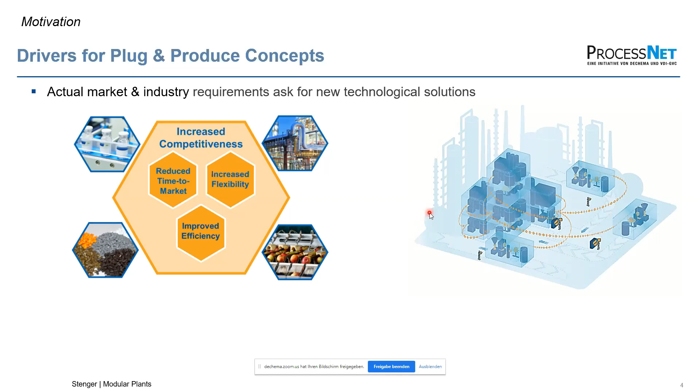The solution that we think can help is modularization on one hand and standardization on the other hand. That could pave the way to a new plant technology, a modular plant technology that uses different process units in a flexible way, connected via standardized interfaces. So really the idea is to make modularization the breakthrough in designing future production plants, applicable not only to new and greenfield plants, but also to optimize existing brownfield plants.

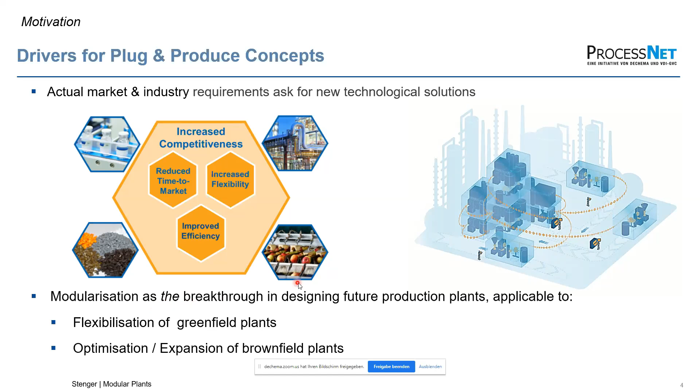When we look at the past, that journey on modularization and standardization started already 10 years ago with a conference in Germany, the Tutzing Symposium, which was called the 50% idea, mainly based on the idea to reduce implementation and development times for new processes by 50%.

Based on that idea, there was the first big project, a European-funded project, the F3 Factory. F3 stands for fast, flexible, and future. Maybe many of you have been part of that project. There were a lot of companies involved, showing that it's possible to modularize process industry from a chemical point of view across a broad range of chemical products.

This was the start, ending in 2013, and this was the point to further gain knowledge, share experience, and continue working on the concepts developed in the F3 Factory. This was when the ProcessNet Working Group Modular Plants was founded, and the first white paper was sent out, which is available on the web page as well.

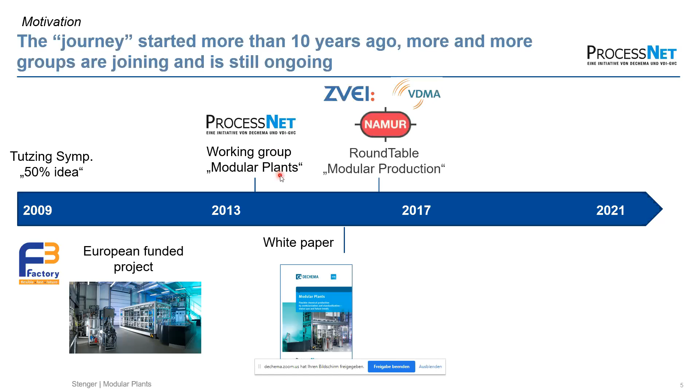It was clear from the beginning that this is not only driven by the owner operators, that there needs to be an alignment with other associations within Germany. So we formed the round table on modular production together with the automation suppliers of Namur, the electronic industry, and also the possible module suppliers. All the associations joined in a so-called round table on that topic, and the first outcome were joint dissemination activities at the Hannover Fair and ACHEMA on that topic.

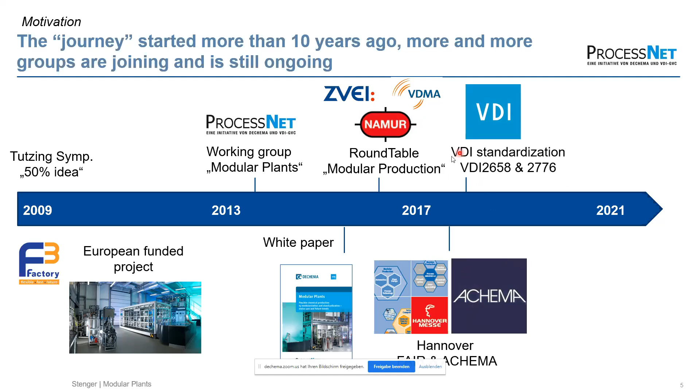Ongoing since 2017, we also started standardization work on these topics, first with national standards under these two numbers. Finally, there was the Tutzing Symposium follow-up, 10 years later, titled '100% Digital,' where modularization again plays a central role. We also started working on internationalization of this topic, with IEC and ISO standards about to follow.

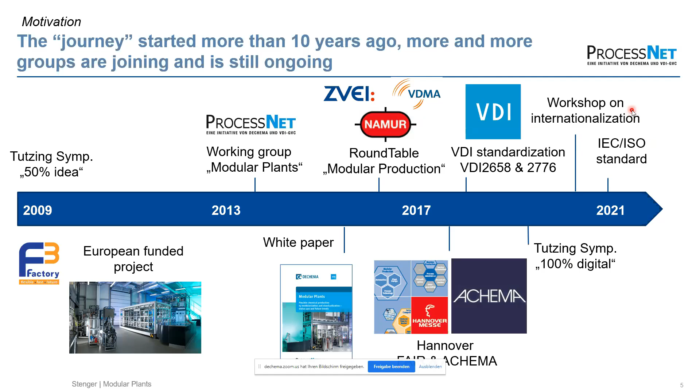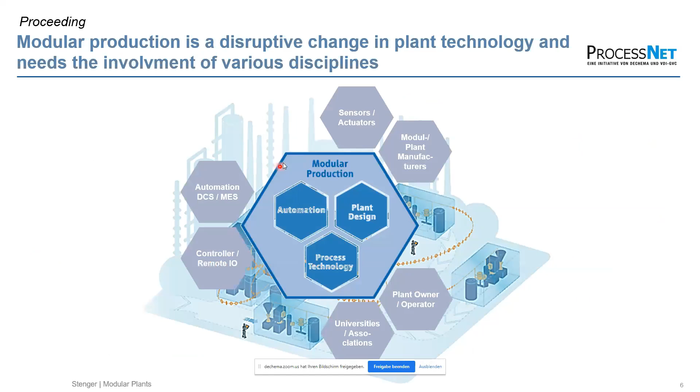So when we talk about such a plant, a modular plant that brings all your units together in a flexible way, it's clear this is a disruptive change in plant technology. It needs the effort of different disciplines: automation, process technology, and plant design. We need the input of all the players: automation, controllers, sensors, module plant manufacturers, plant owners, and of course universities as well.

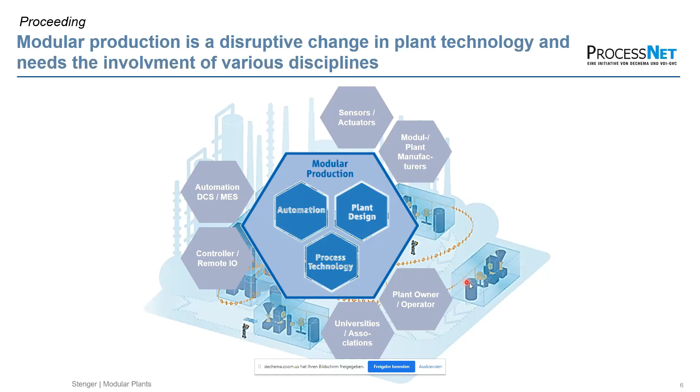So all these disciplines are now working together in a big round table. And if you look at all the companies already involved, you see there's quite a broad interest in bringing that know-how and that technology further into the market.

Owner operators like Merck, Evonik, BASF and so on in the chemical industry, as well as key players in automation technology like Siemens, ABB, and DCS system providers Honeywell, Emerson, Yokogawa and so on, they all joined in order to bring that technology further.

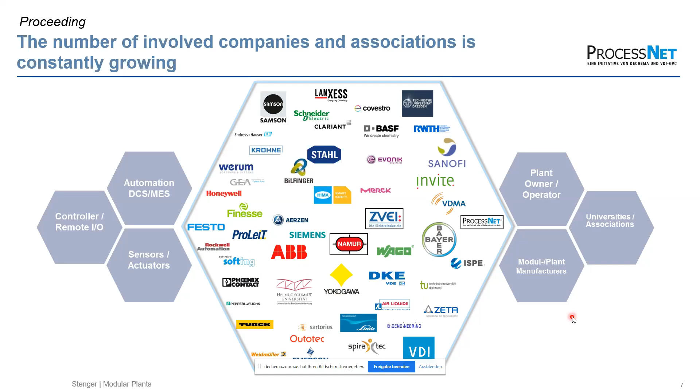So how did we start? We started with standardization work, dividing the modular plant approach into four different layers. On top you have the modular plant, which consists of different modules. We call these modules process equipment assemblies, fulfilling a certain process functionality, for instance feed, dosing, reaction, separation, and so on.

Inside these process equipment assemblies, we have subunits called functional equipment assemblies, or FEAs, that you can exchange in order to adapt the applicable range in the production and process environment. And of course these FEAs consist of components, machineries, pipings, fittings and so on.

So these four layers form the basis of modular process technology, and this is written down in standardization work that you can follow up under these numbers.

And of course there's automation technology on the different levels as well. Central is that all these modules have their own intelligence, their own module automation, control PLC system, and they are intelligent on their own.

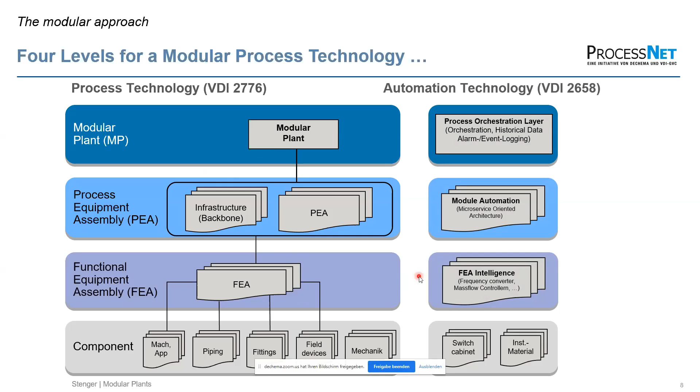With having these layers, it was possible to set up a new modular plant engineering approach that starts outside the process, with modular engineering and designing standardized process modules fulfilling a certain functionality, bringing along their own intelligence, their own control and automation system.

Out of these modules provided from the market, in the end you start your modular plant and decide about the functionalities needed. Then you look up what modules are available on the market that fulfill your requirements. You pick these modules, ideally from the module designer, and configure your modular plant design in a new way, composing the process out of existing modules.

You put them together across standardized interfaces, which really speeds up the whole implementation time. And finally you bring them together in a productive environment, and orchestrate these different modules across a simplified orchestration layer that is capable of doing rearrangement in a very flexible and easy way.

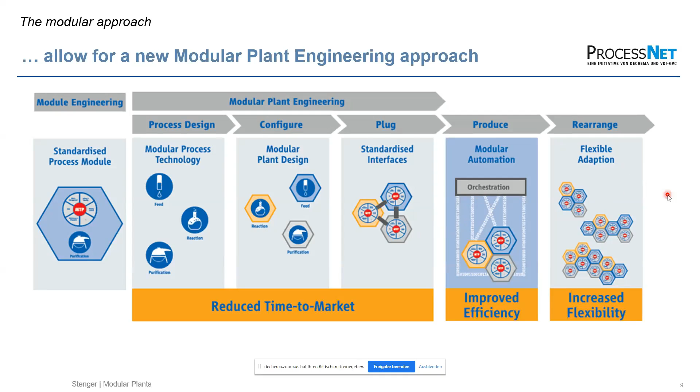As I pointed out, that data interface between the modules is key and crucial for success, in order to exchange certain modules and bring in other modules easily. For that, colleagues from the automation interface developed this module type package, the so-called standardized non-proprietary interface, describing all the functionalities that a process equipment assembly is capable of.

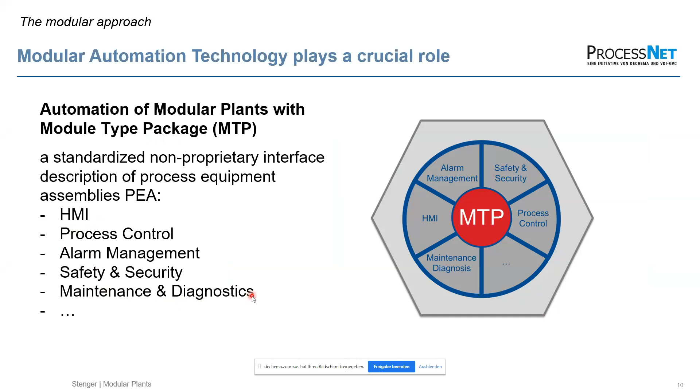It brings across all the HMI that is necessary, functionalities for process control, alarm management, safety and security, and also maintenance and diagnostics, and can be easily adapted no matter what supplier is providing the module. So this is really key to have that.

Maybe to understand it better, you could compare this MTP, module type package, in analogy to a printer driver that you install and easily plug into your PC system, which is capable of transferring your data to the printer and assures that the outcome is what you expect.

Similarly, the MTP is a kind of device description that enables a process control layer to implement the functions and services that different modules provide. So maybe this illustrates how crucial it is to have and implement that.

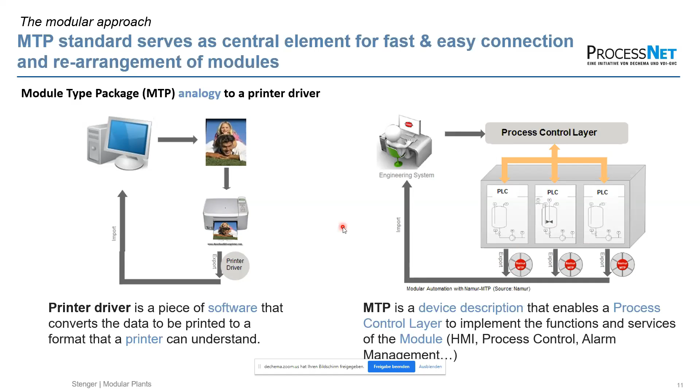So what about the status? As I said, we have two national standardization guidelines that describe what I've outlined: VDI 2776 and VDI 2658, describing the mechanical aspects and the automation interface of the modular system respectively.

Some papers are already available in white print, meaning they are public, available in German and in English, and they are now going into international standardization, the IEC and ISO system as well.

Having these standards now in place allows for first commercial products and implementation as well. So now we have this standardized interface, making it possible to easily connect and reconnect modules to a DCS or orchestration system.

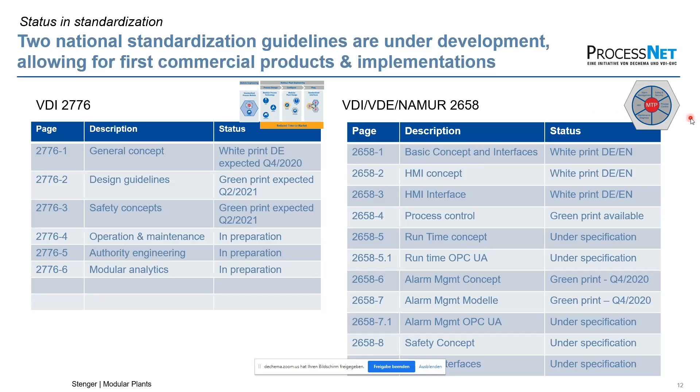So, we started with a lot of implementations in the lab and in pilot plants, where a lot of flexibility is needed. This gives you an insight into an example from Evonik. This is how we set up our labs now, in modules.

We have control boxes in each module available, connected to the orchestration layer, and we can easily exchange these modules. It's really like plug and produce, an easy rearrangement, bringing benefit to the whole lab and to the efficiency of our R&D and development work.

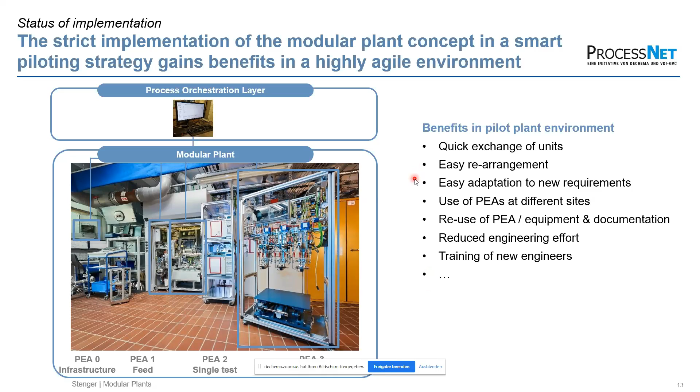Martin, I think we have a technical problem, maybe. I confirm we have a problem.

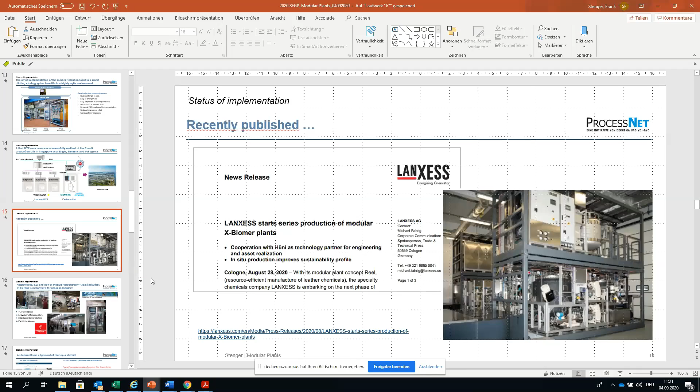Franck, we have got a problem, we don't see your screen. Can you hear me? We hear you. Yes, sorry. Maybe I can. We can't hear you anymore. Is it better now? Yes, now we can hear you again, but we cannot see your screen. I'll start again, sorry. Is it working now? Yes, that's okay, you see the screen again? Sorry, maybe you can repeat your previous slides. Did you see that slide already? Hello? Yes, the previous slide please. This one? Yeah, so this was the last slide. Okay.

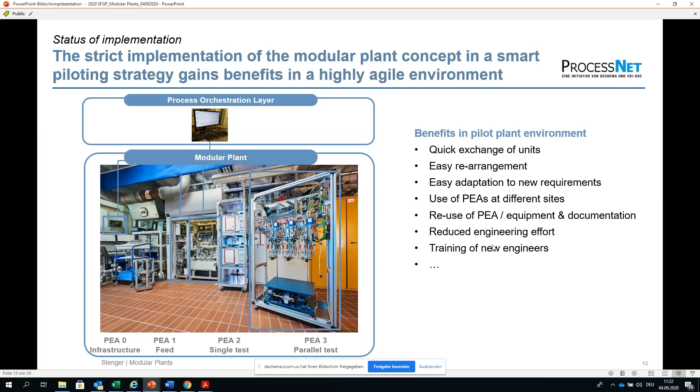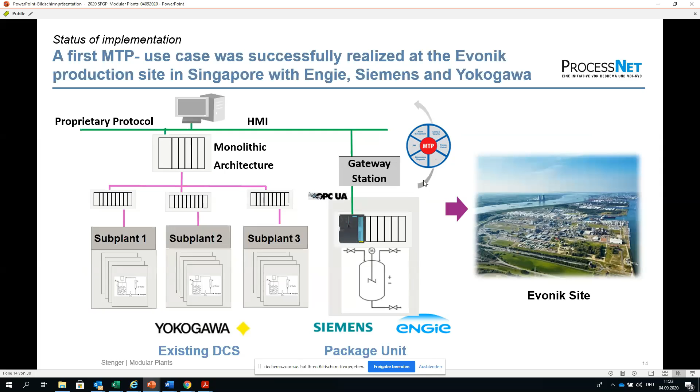Sorry for that. So this was the example of implementing the modular system in the lab environment, bringing these benefits to lab and development. But this also works for going into a large scale plant when implementing package units into existing plants that are already operating in a monolithic architecture. We showed this last year at the Singapore site of Evonik, implementing a package unit, a chiller unit from ENGIE that has an automation system of Siemens via that already mentioned standardized MTP interface into a Yokogawa system. And it turned out that this could be real. Further package units of Evonik we will implement in that new way of doing modular data implementation into existing HMI systems.

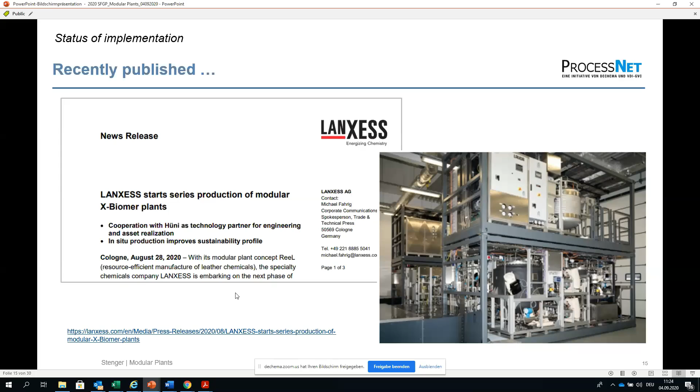And that brings me to the last example, recently published from Lanxess, on starting a production series of modular X-Biomer plants, in order to have it flexible and to bring them to different leather plants. They started a cooperation together with Hüni, bringing that technology now into production and into the market as well. This shows that the system not only works now for the R&D and pilot plant environment—it starts going into the market, into small scale production already.

This gives you an insight into the work we are doing. So, Industry 4.0, the age of modular production. There are a lot of joint activities now together with different groups, showing more and more demonstrators, hardware as well as software, and showing you how it's possible to connect these different process units.

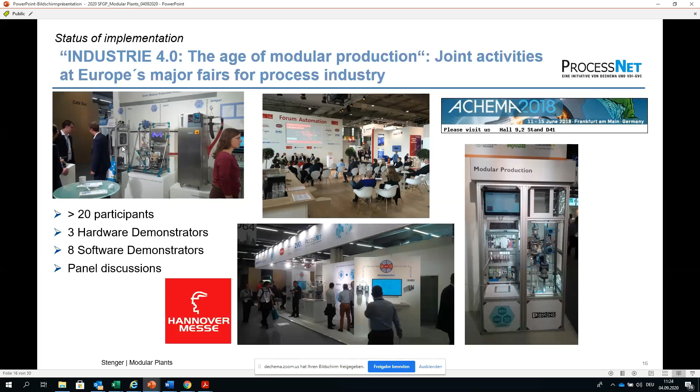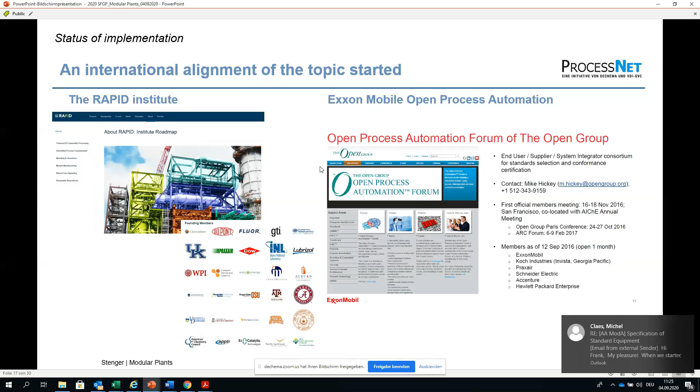Of course that's a remaining challenge. Nevertheless, it already starts, and we try to align on that topic already. If you look into the US, there's for instance the RAPID approach, how they intensify process technology in the future, and this brings along these different peers as well. So it starts in the US as well. And ExxonMobil Open Process Automation is a forum about how to standardize these data interfaces, as I've introduced to you a few slides before. So there's ongoing alignment and validation of that topic as well.

Nevertheless, there are remaining challenges. Although it's promising and we have the first implementations in place, it's a disruptive technology, and it's a technology change that really requires a mind change of the whole community. This includes management inside the companies as well as staff personnel, really in the daily life. And this takes time, so you need good arguments, good dissemination activities, good examples that show this really brings a benefit.

So of course we will not rapidly change from monolithic or conventional plants to modular, so we need a transition phase. This is still a challenge, really, to bring these new systems into existing plants. It's possible, but it needs some adaptations going forward. And of course, there are still open development tasks in the field of automation, how to really realize the orchestration of all the different modules, and authority engineering—we talked about regulation this morning as well—to do that in a flexible and fast manner. It makes no sense to be ready with your process technology if it takes years to get authority approval. Then this will not pay off.

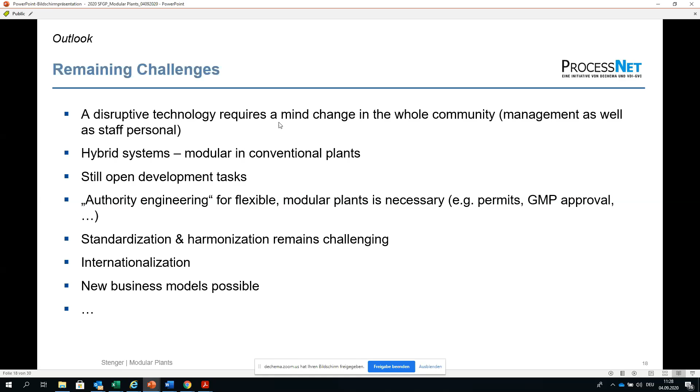With that, I would like to thank you for your attention, and I'm open to questions. And sorry again for the trouble with the slides in between.